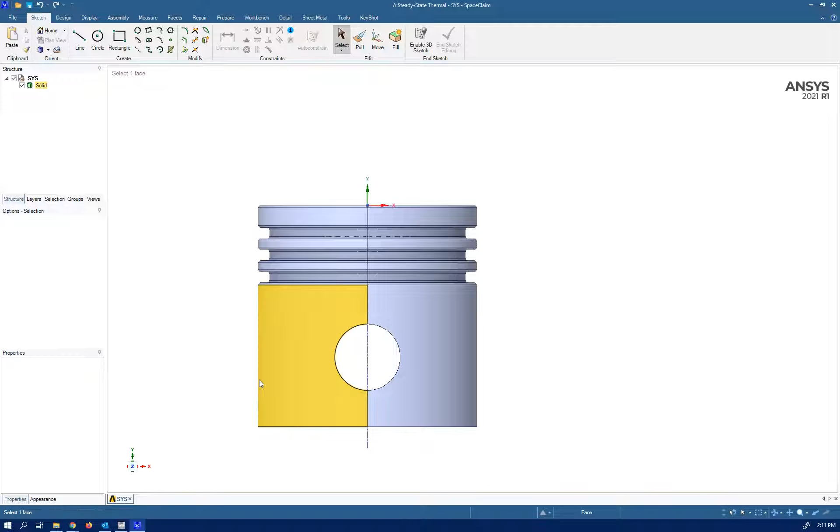So we need to open the geometry. As you can see, this is our piston, and we remember when we had a structural analysis around this fixed support, we had the highest stress concentration.

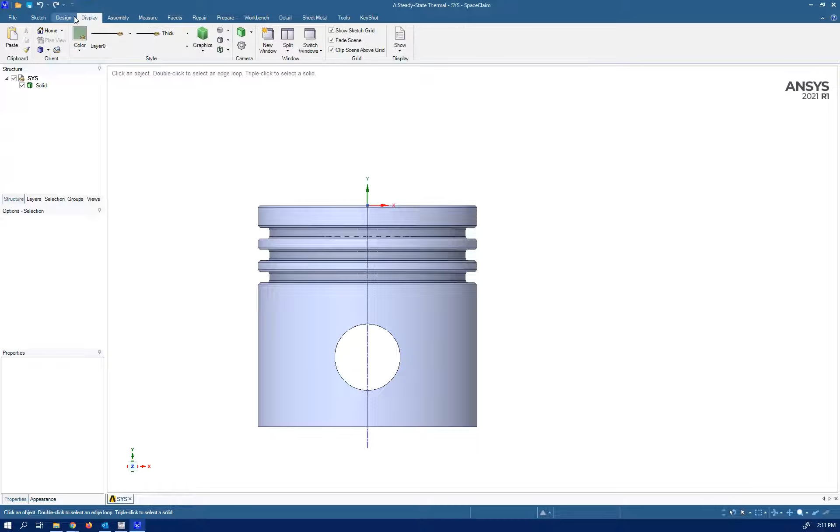So I want to have a little bit of better refinement here for this area. So what I'm going to do, I'm going to use the imprint technique. First I need to have a plane which is perpendicular to the z-axis. Okay, now I created that plane, and now let's draw a circle.

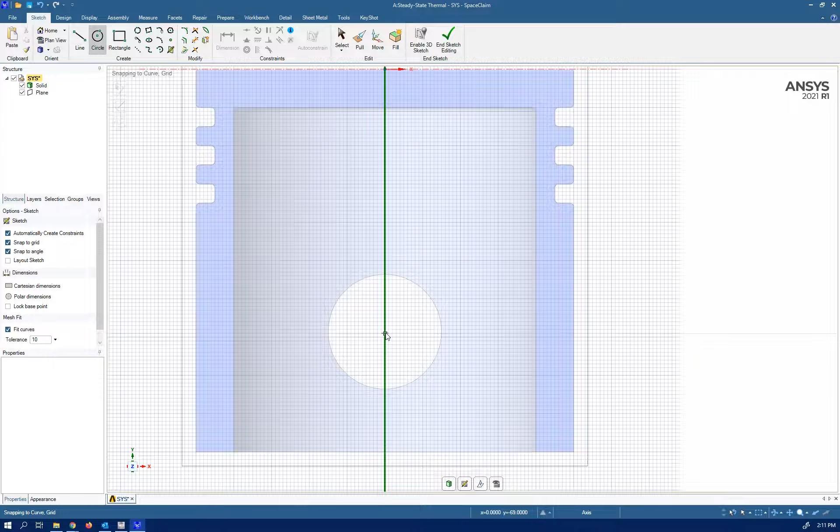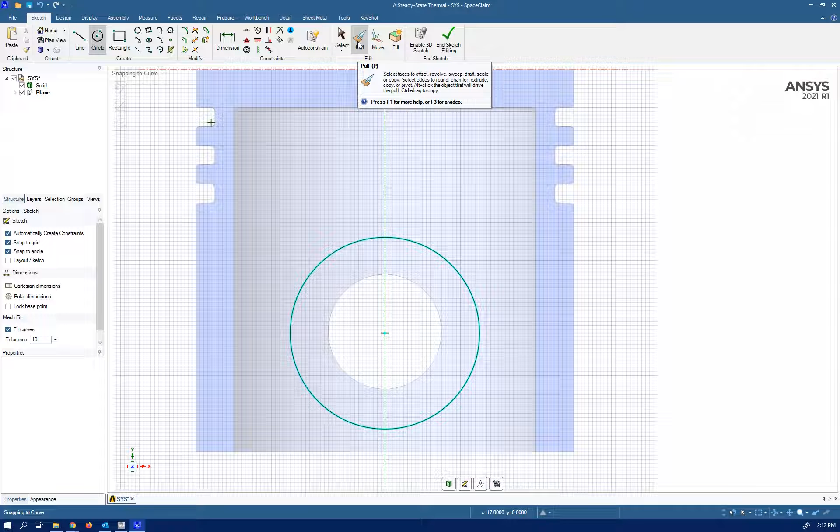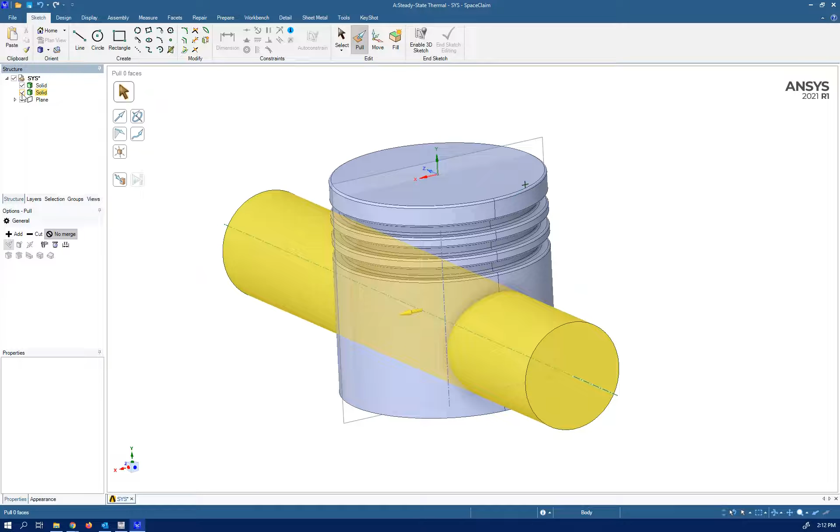And here, so I created this cylinder here. As you can see, when I turn it on and off, you can see the cylinder there.

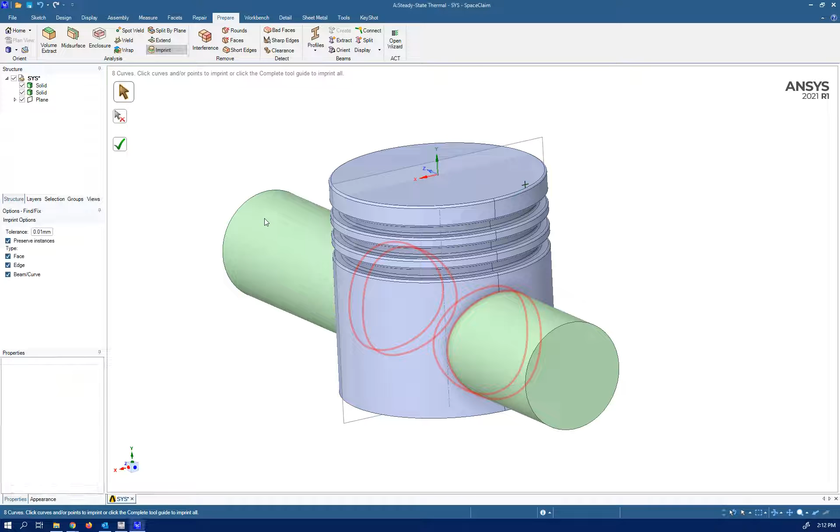Now we go to the prepare option and select imprint. This option is going to search to see where is the contact point between the cylinder and the geometry we have. As you can see, it identifies this area, the red lines, which are the contact between those two geometries, and I want to keep those as my imprint. So I'm going to select OK.

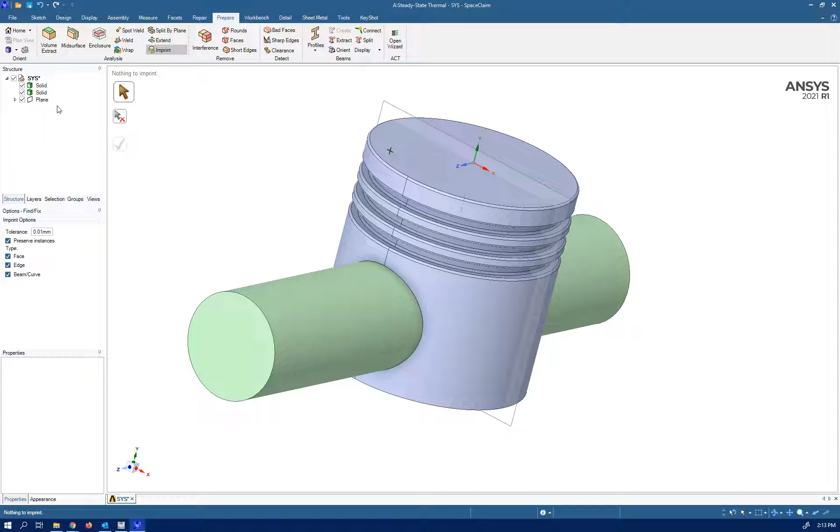So now I don't have any use for this cylinder, so let's just delete it.

And now you can see why imprint is very important and useful for local refinement, because now I can select this section, and before this, if I click this surface, it's going to select the whole area. By imprinting, now I have an area which I can click and select the specific area.

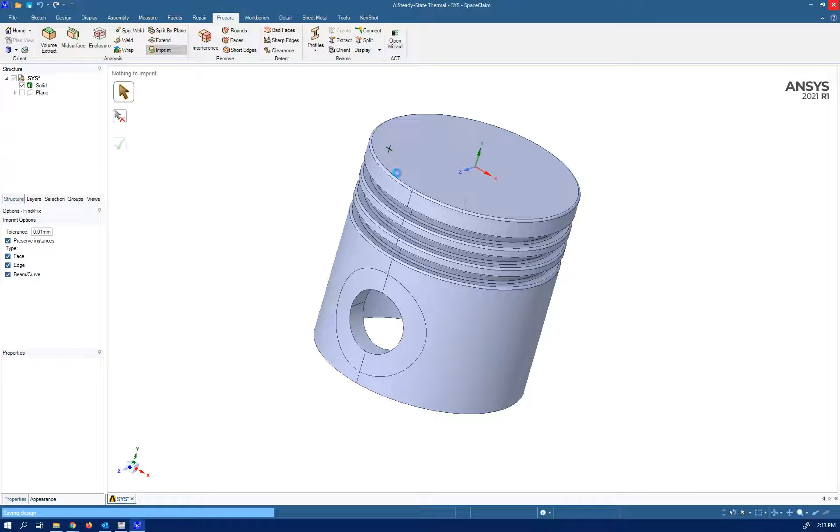Let's go and check what is the effect of this work. Let me open it.

This imprint geometry can be any shape, any size, so it's not just about cylinder. I drew a cylinder, but you can draw a rectangle, depends on the geometry and the area of local refinement you're looking for. It can be different.

Okay, almost our geometry is here. Still it hasn't read the previous file, and otherwise we should have the imprint area here. Okay, now it started. Great, now we have this imprint area presented here.

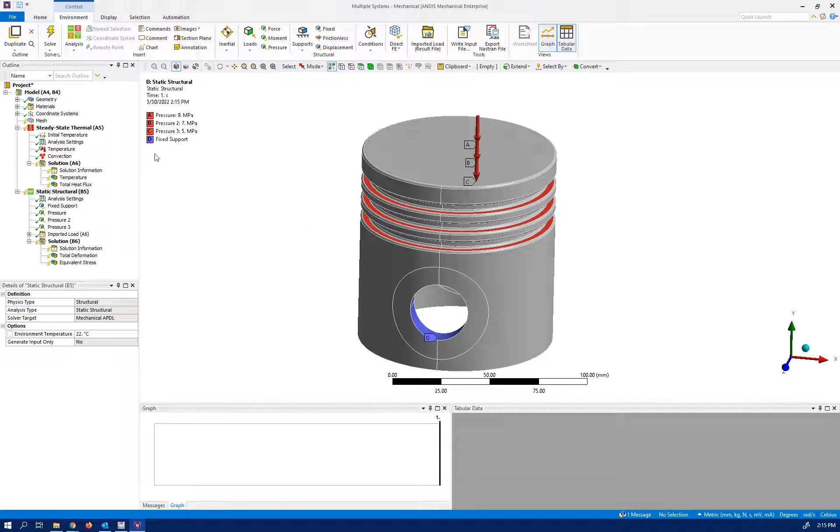So let's have a little bit of fun with this mesh. I'm going to have refinement here, here, and the same thing for the other side, this one and this one. Let's apply a refinement of maybe 2, and I also would like to have sizing.

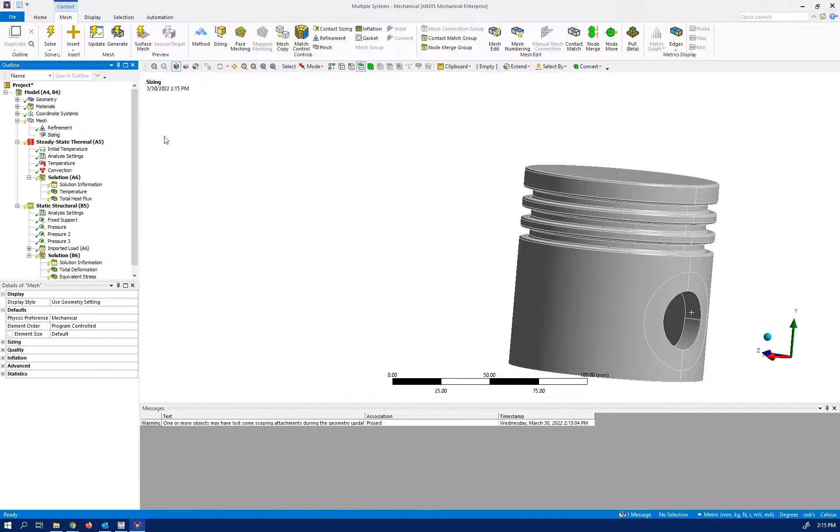Different sizing for this area, this area, this area, and this area, which I already imprinted, and of course with the inner part too. Let's apply, let's go with 4 millimeters.

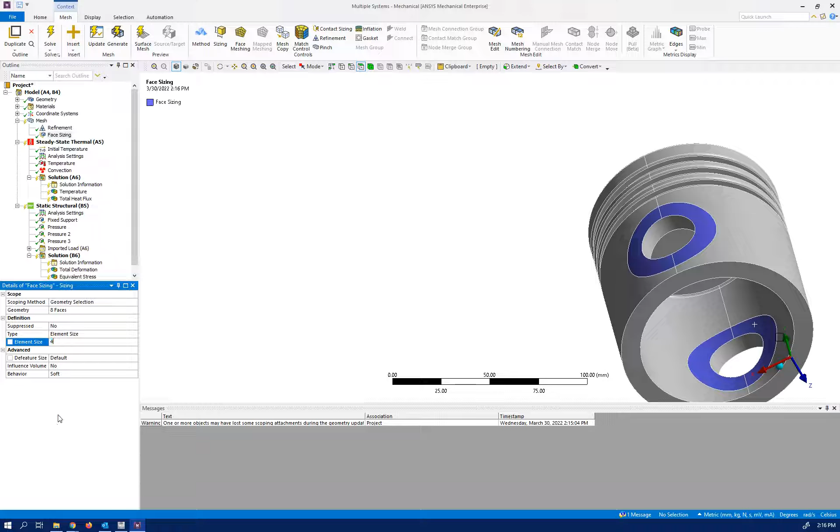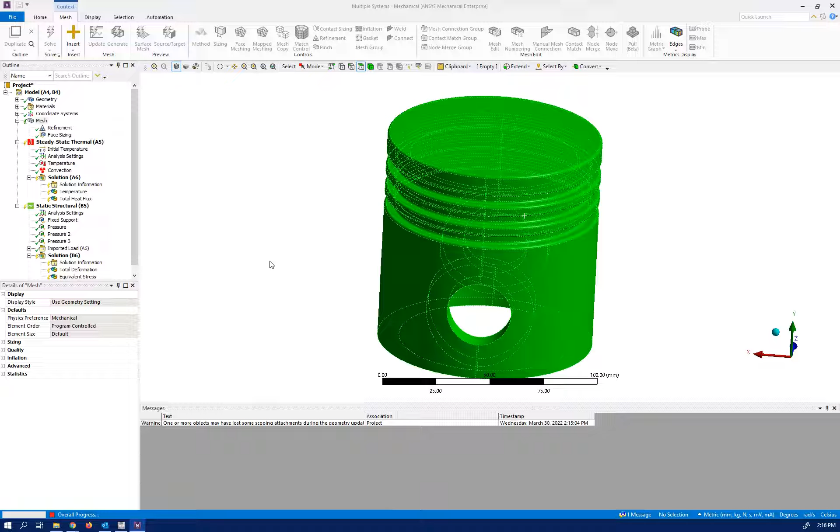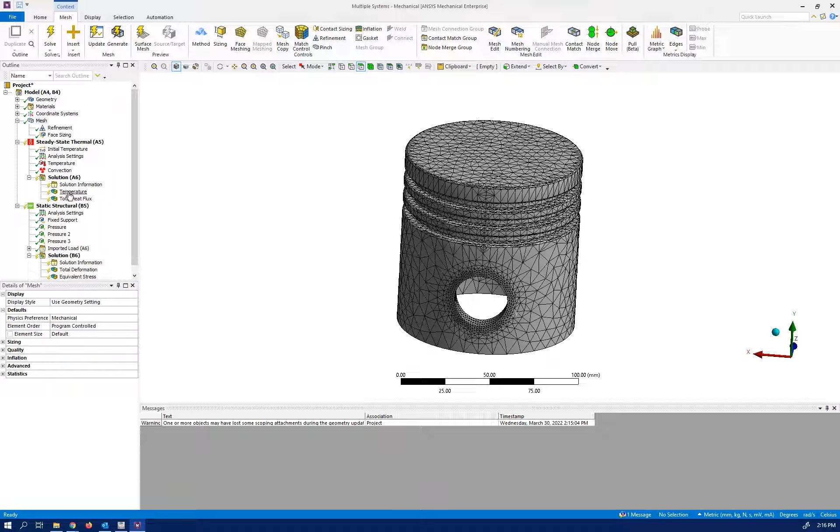Okay, now let's check what is the effect of the mesh refinement we applied to this fixed support, the vicinity of our fixed support. Okay, now you can see we have much better mesh around this area which I imprinted. And we already know we have a stress concentration, so the solution should be, okay, it seems I need to solve this.

Okay, when we apply any change to the geometry, we need to solve again, because ANSYS doesn't know what type of change we applied. No problem with this one, let's solve the structural analysis.

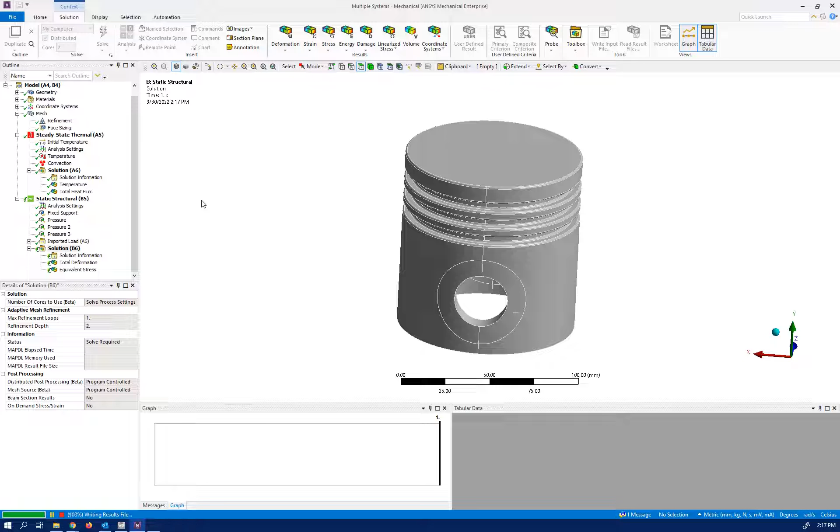So the number of elements would be a bit higher, but we locally refined, and we expect it to have better and more accurate results. Okay, let's see, this is the deformation and the max stress. Let me turn on the maximum. Okay, we had maximum stress here, which we have already refined this mesh.

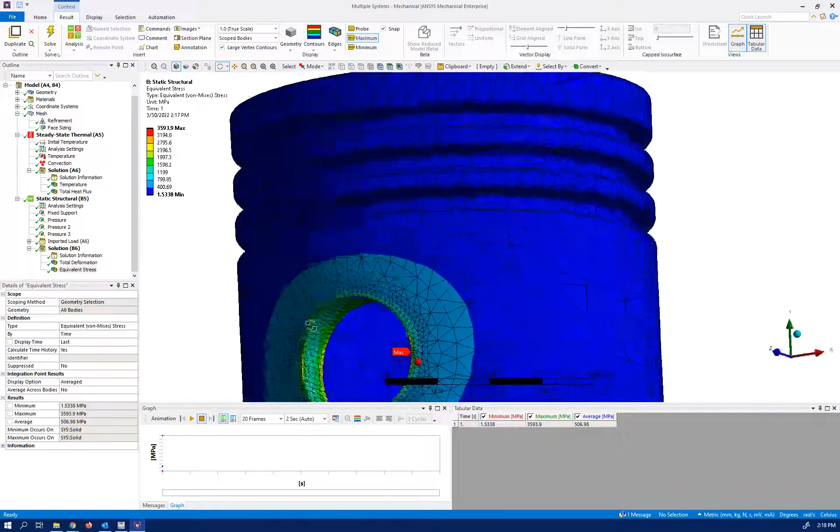So I'm not telling you this is the best refinement technique for this geometry. There are other techniques which may be better, but just to show you this technique, I selected this geometry to apply here. Okay, thank you very much.